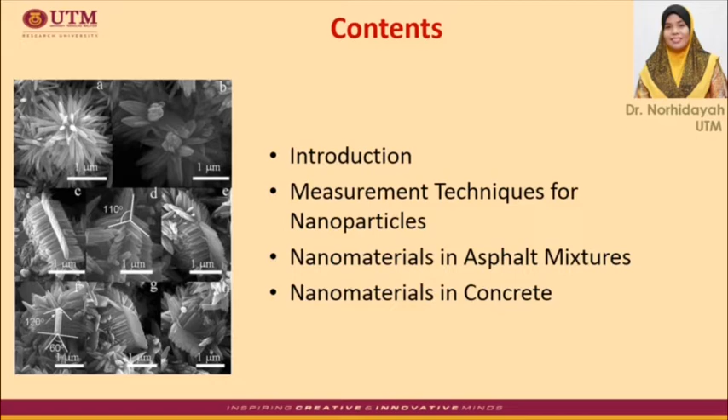Okay, this is the table of contents. The topics we're going to discuss today: first, some introduction about nanomaterials and nanotechnology, then measurement techniques for nanoparticles, nanomaterials in asphalt mixture, and finally nanomaterials in concrete. Okay, first, let's have a look at the overview of nanotechnology.

Nanotechnology is science, engineering and technology conducted at the nanoscale, which is about 1 to 100 nanometers. It is a branch of technology that involves the application of extremely small things and can be used across all other science fields such as chemistry, biology, physics, material science and engineering.

Compared to previous works before the year 2000, most studies focused on macro and micro research. After 2000, nanoscience became significant in solving industrial problems. Nanoscience and nanotechnology involve the ability to see and to control individual atoms and molecules.

Everything on Earth is made of atoms: the food we eat, the clothes we wear, the buildings and houses we live in, and even our own bodies. But something as small as an atom is impossible to see with the naked eye, and therefore many more technologies are discovered for better understanding of nanomaterials.

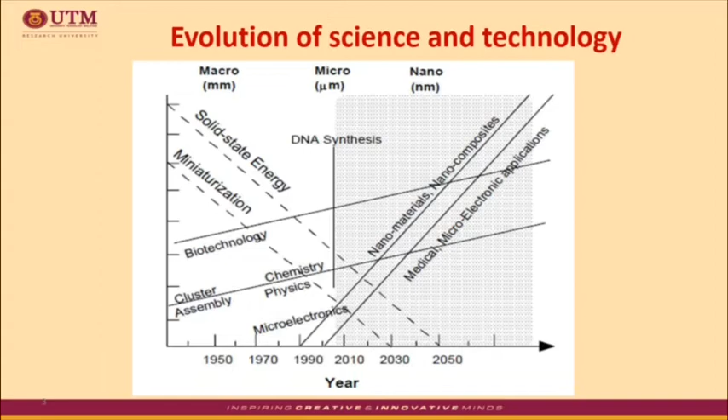Okay, let's have a look at the application of nanotechnology. The 2000s saw the beginning of applications of nanotechnology in commercial products, and most applications are limited to the bulk use of passive nanomaterials.

Currently, the major application is related to the following products: for example, titanium dioxide in sunscreen, cosmetics and some food products; silver nanoparticles in food packaging, clothing, disinfectants and household appliances; carbon nanotube for stain-resistant textiles; and cerium oxide as a fuel catalyst.

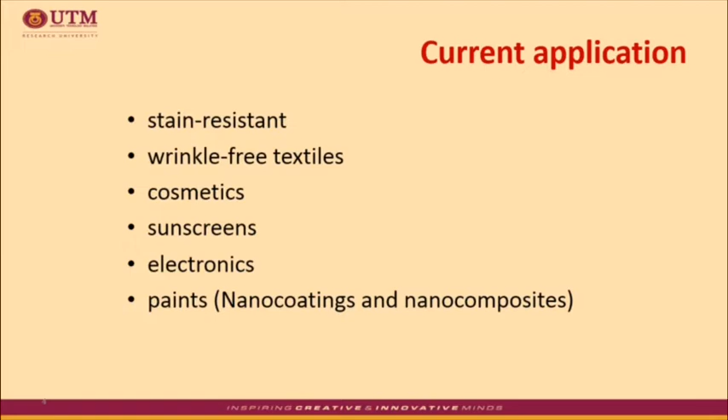Other major applications are also significant in the field of electronics and paints, such as nanocoating and nanocomposite. And then there are many more applications in other fields.

Nanotechnology is also being applied or developed for a variety of industrial and purification processes. Purification and environmental cleanup applications include water filtration, wastewater treatment, and groundwater treatment.

In the construction industry, applications may include construction materials such as for steel fabrication, in glass, surface coatings, as well as for fire protection and detection.

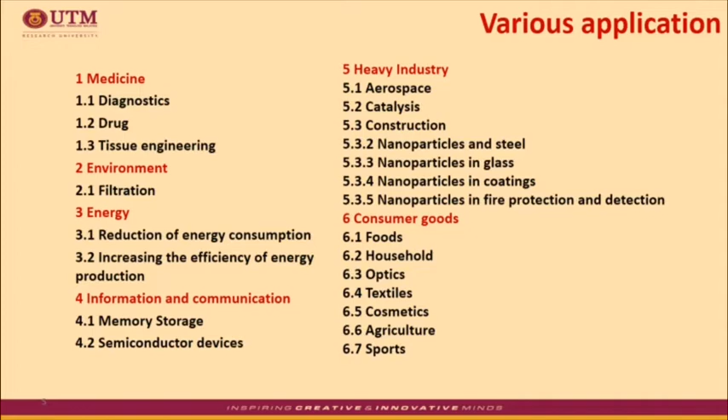So basically, what is nano? The word nano is used to indicate 1 billionth of a meter, or 10 to the power of minus 9, and a world of things is built up from the tiny scale of nanometers.

Nanoparticles or nanomaterials, in principle, refer to material particles having dimensions and tolerance of less than 100 nanometers, or between 1 and 100 nanometers, especially involving the manipulation of individual atoms and molecules. This concept of nano takes advantage of the particle's characteristics, which are very small in size.

It's lighter, where particles can move faster, and also has a high specific surface area, making the material more reactive than materials at micro or macro size.

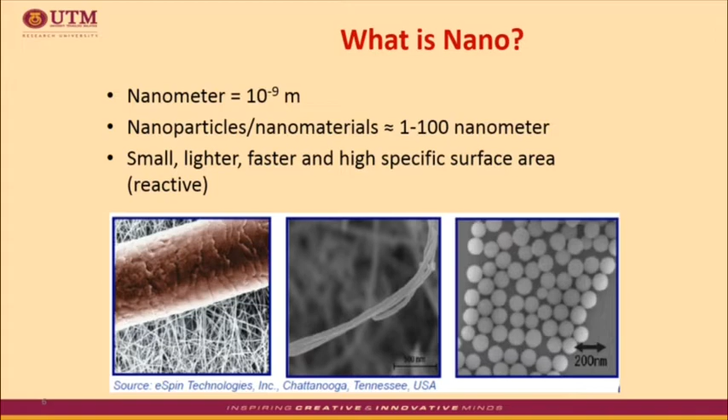Based on this slide, the figure compares different things with various sizes on the nanoscale, from the size of a baseball at 100 million nanometers to bacteria size of 1000 nanometers, and of course these are not considered nanoparticles yet. As mentioned, nanoparticles or nanomaterials are considered at the size of less than 100 nanometers, as shown in the figures such as the virus, protein or DNA, glucose, and finally water molecules.

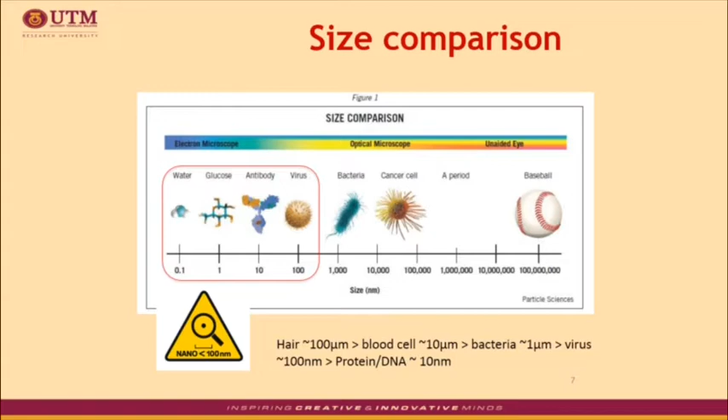Well, the closest example is water. Water is an example of nanoassemblies of molecules, where the size of the water molecules is within the nanoscale, made of oxygen and hydrogen.

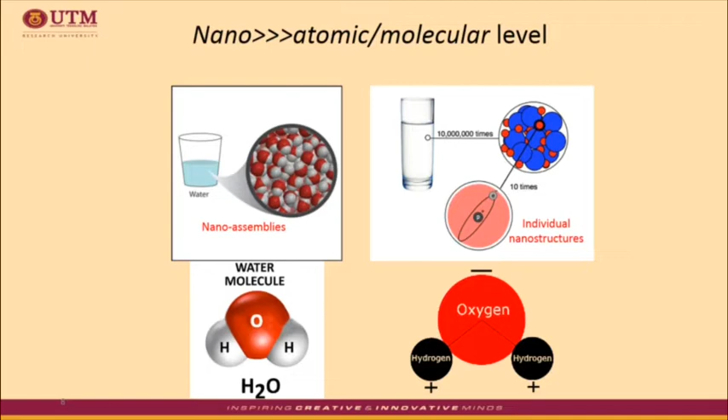Okay, now let's have a look at various terms related to nanomaterial study. First is quantum mechanics, or sometimes called quantum physics. This term can be referred to as a subset of physics explaining the physical or mechanical behaviors at the molecular and atomic level.

Other than that, any material studied at the nanoscale level will normally be considered as ultra small or superfine material. So when we talk about nanoscience or nanotechnology, it's about the study of materials at the nanoscale, which involves the design, fabrication, and application of nanostructures or nanomaterials.

And this study requires advanced imaging techniques for investigating the material's behavior and producing very fine powders with particle sizes between 1 to 100 nanometers. Furthermore, the study also covers the fundamental understanding of the relationships between physical properties and material dimension.

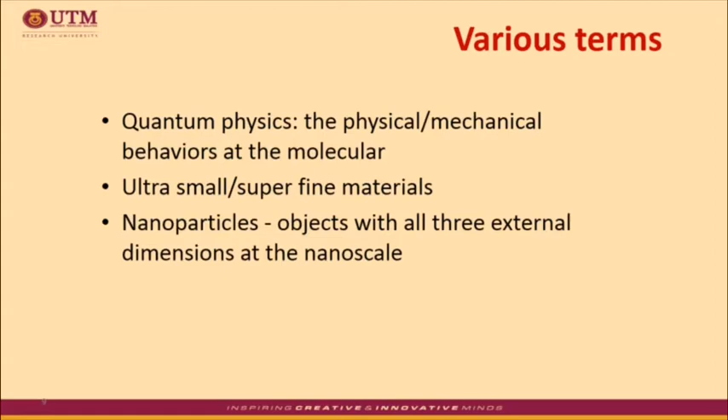Next is the nanomaterials. So how can we define the nanomaterials? This is not a new undiscovered material. It can be produced from any types of normal materials but they are very small in size. Like what I have mentioned earlier, at least one external dimension is in the size range of 1 to 100 nanometers.

So due to their small size, the properties are no longer the same as when they are in a big size. And they can be either organic or inorganic. For example, metal, polymer, electronic, ceramic, and composite.

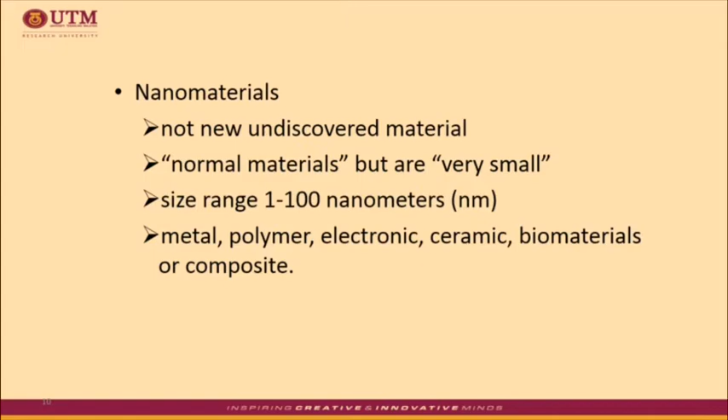Today, scientists and engineers are finding many ways to produce materials at the nanoscale. This is to take advantage of their enhanced properties such as higher strength, lighter weight, increased control of light spectrum, and greater chemical reactivity than their larger scale counterparts.

The unique properties of nanomaterials have led to their use in many applications in industrial and non-industrial sectors like aerospace, construction, energy, textile, automotive industry, transport, and medical technology. A few examples of application are presented in the table, as you can see here, such as carbon nanotubes, titanium oxide and dioxide, platinum, iron silica, nano clay, silver and gold, and graphene.

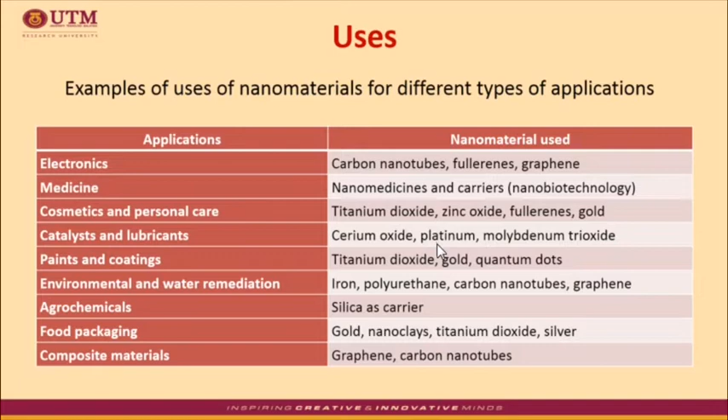Okay, next we have a look at the classification of nanomaterials. In general, they can be identified according to their dimension and morphology, which is their form and shape. Nanomaterials can be classified as, first, zero-dimensional, such as spheres and clusters, then one-dimensional, such as nanofibers, next two-dimensional, such as films, plates, and networks, and finally three-dimensional, which can be in many forms.

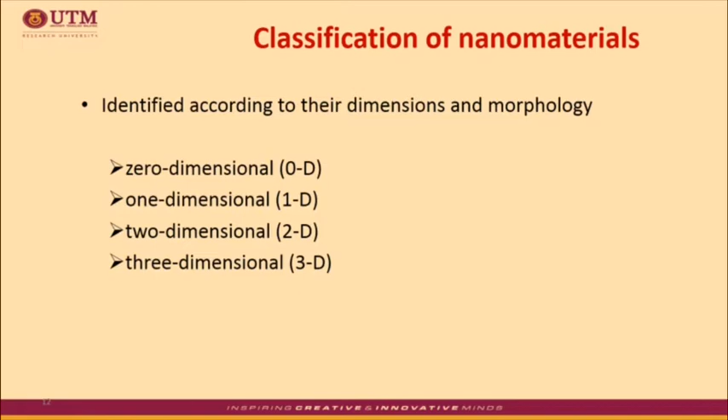Okay, let's have a look at the details of the classification. This slide shows the details of the various dimensions of nanomaterials. First, like I said earlier, we have zero-dimensional, which refers to a nanoparticle with all dimensions in nanoscale, which is less than 100 nanometers. It's like one dot.

And then we have one-dimensional, where at least two dimensions are in nanoscale, such as nanotubes and nanowires. This refers to the cross-section of the nanotubes, for example, as you can see from the image provided, which means the length of the nanotube is not in nanoscale, but the cross-section is.

And then we have two-dimensional, which has one dimension in nanoscale, for example, the film thickness. The film thickness is less than 100 nanometers, but the grains are not nano size. It's microcrystalline. Applications include, for example, nano coatings, nano laminates, and nanofilms. So meaning that not all the dimensions of the nanofilm are in nanoscale, only the thickness.

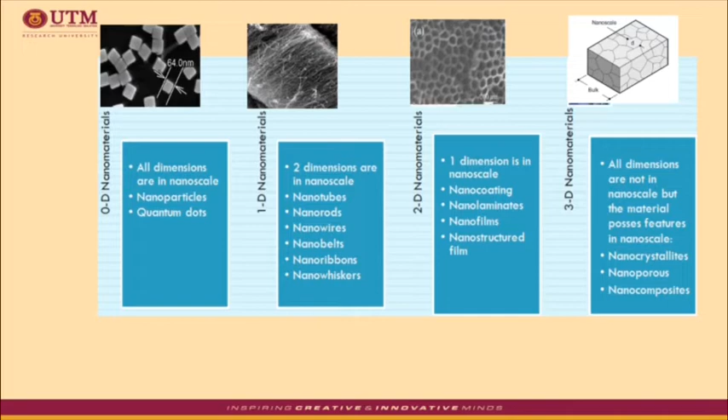Okay, next we have three-dimensional nanomaterials. This time, the film has a thickness of more than 100 nanometers, but contains grains with dimensions in nanoscale, or nanocrystalline, such as the nanocomposite. So it can be in various forms, whether made of glass or metal, or any other relevant material. Later, we're going to discuss different types of nanomaterials used in asphalt mixture and also in concrete.

The high surface-to-volume ratio introduces many size-dependent phenomena that lead to greater chemical reactivity and mechanical properties such as strength. An increased surface area-to-volume ratio also means increased exposure to the environment. The surface area-to-volume ratio for a material made of nanoparticles has a significant effect on its properties. Firstly, materials made up of nanoparticles have a larger surface area compared to the same volume of material made of bigger particles. For example, let us consider a cube as shown in the slide.

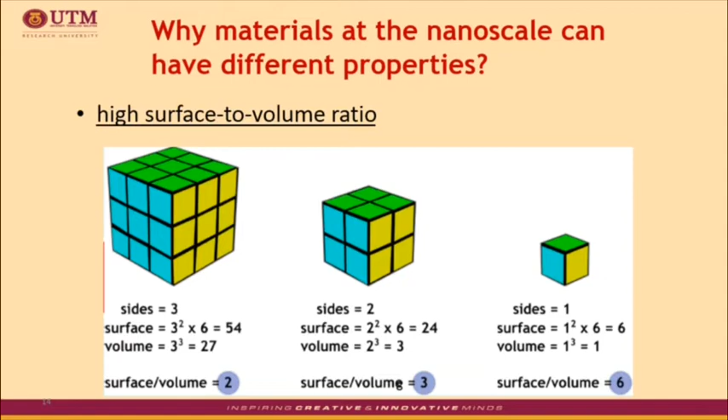There are two components of the synthesis of nanomaterials. First is to make or produce the nanomaterials, which involves two major processes: top-down and bottom-up. Second is to characterize the size-induced properties or performance, for example, in various chemical compounds such as metal or elements such as carbon and oxide, and also the morphology and structure of the materials.

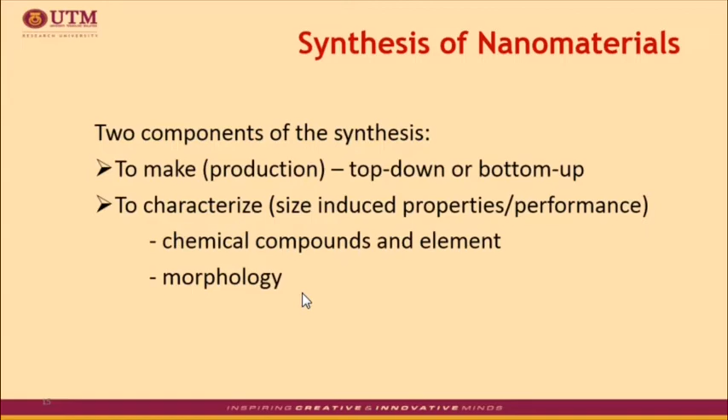Okay, next we have a look at how to create nanomaterials. There are many different ways of creating nanostructures, and of course, macromolecules or nanoparticles and so on can be synthesized artificially for certain specific materials. Using these methods, synthesized materials can be arranged into useful shapes so that finally the material can be applied to a certain application.

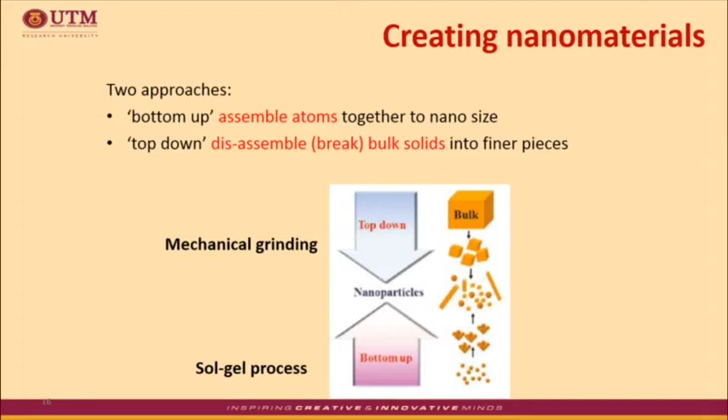The first figure shows the schematic representation of the principle of mechanical milling. This is a typical example of a top-down method of nanomaterial synthesis, where the material is prepared not by cluster assembly but by the structural decomposition of coarser-grained structures as the result of severe plastic deformation. This has become a popular method to make nanomaterials because of its simplicity. Another benefit is that the equipment needed is not expensive, and it's applicable to different classes of materials.

However, there are concerns about this method, such as contamination from the milling process. In fact, the contamination problem is often given as a reason to dismiss the method, at least for some materials. Mechanical milling is typically achieved using high-energy shakers or mills. The energy transferred to the powder from the steel balls depends on the rotational speed, size and number of the balls, ratio of the ball to powder mass, and the time of milling. So nanoparticles are produced by the shear action during grinding.

The second figure shows the schematic representation of the sol gel process of synthesis of nanomaterials. The sol gel method is very popular amongst chemists and widely employed to prepare oxide materials. In materials science, the sol gel process is a method for producing solid materials from small molecules. This process is a wet chemical technique that uses a chemical solution to produce an integrated network or gel. They undergo hydrolysis and polycondensation reactions to form a system composed of nanoparticles dispersed in a solvent.

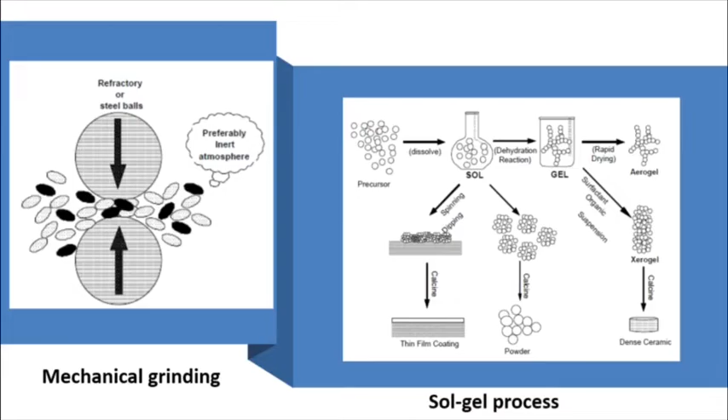So after creating the nanomaterials, they can be characterized in terms of physical properties such as area and shape, chemical properties such as reactions, compounds and elements, and their structural properties in terms of mechanical properties, particularly strength.

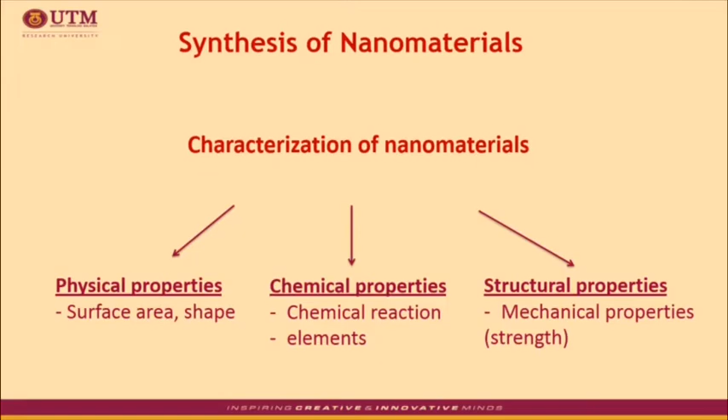Okay, as I mentioned previously, nanotechnology has been used in various fields, including civil engineering works. Here are some of the unique properties provided by having nanomaterials in the structures: lighter and stronger composites, fire insulation, which refers to the reduction in thermal transfer rate, sound absorption, water repellence or waterproofing, and finally, better cementitious materials.

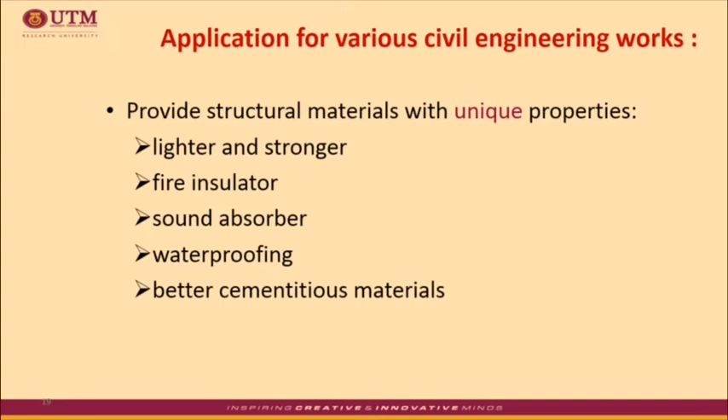Okay, next, let's have a look at measurement techniques for nanoparticles. There are various techniques for detecting, measuring, and characterizing nanoparticles. There is not a method that can be selected that is the best method, but rather a method is chosen to balance the restriction of the type of sample, the information required, time constraint, and the cost of the analysis.

A straightforward technique may simply detect the presence of nanoparticles. Others may give the quantity, the size distribution, or the surface area of the nanoparticles. These measurement techniques differ from characterization techniques for assessing the chemical content of a nanoparticle sample, the reaction on the surface of the nanoparticles, or the interaction with other chemicals present. And sometimes, measurement techniques will be combined to provide more information from one sample.

So basically, the properties of nanoparticles are size-dependent and can be expressed in a linear dimension characteristic derived from its shape. There are two basic concepts of the measurements. First is by taking the actual measurements of the dimension using microscopic techniques, for example, the measurement of many dimensional parameters from the particle image. Second is by considering the relationship between particle behavior and its size, such as using dry powders dispersed in suspension.

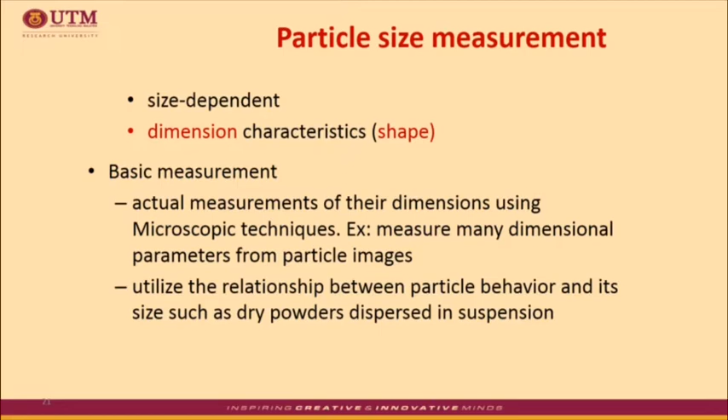This slide shows the different measurement techniques such as field emission scanning electron microscope, FESEM or SEM, high resolution transmission electron microscopy, TEM or HRTEM, and then PCS, surface area analysis, and XRD. Since different techniques provide different information, efforts have been made to standardize the way nanoparticles are measured. This is to assess the risk of exposure to human health and the environment. The details of the technique will be discussed in the next slide.

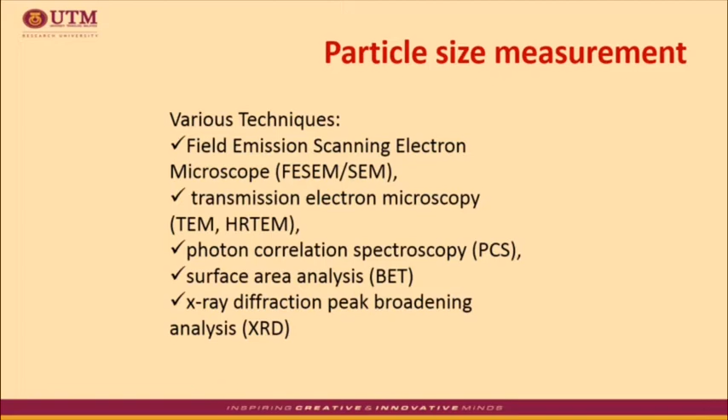First, let's start with the microscopy method. These three methods are normally used to determine the nanoparticle size and characterization. The first is scanning electron microscopy or FESEM, field emission scanning electron microscopy. This method uses a high energy electron beam and the beam is scanned over the surface. The sample must be under a vacuum and electrically conductive at the surface. This can be achieved by having a coating on a non-conductive sample. This requirement can be restrictive, and again, this technique can be time-consuming and expensive.

Then, the transmission electron microscopy. These techniques combine the ideas of looking at the surface of the sample and into the sample with an electron beam. It uses an electron beam to interact with a sample to form an image. The sample preparation can be difficult as a thin sample must be prepared, and the process can be time-consuming and costly. So another version of TEM is HRTEM or High Resolution Transmission Electron Microscopy. This gives a higher resolution which is beneficial when studying nanoscale samples. However, it does require understanding of the sample to allow better description of the results.

Next is the atomic force microscopy or AFM. It's a form of scanning probe microscopy. It uses a mechanical probe to feel the surface of a sample. This can offer a 3D visualization for air samples or liquid dispersions. This technique requires less cost and time than the TEM or SEM.

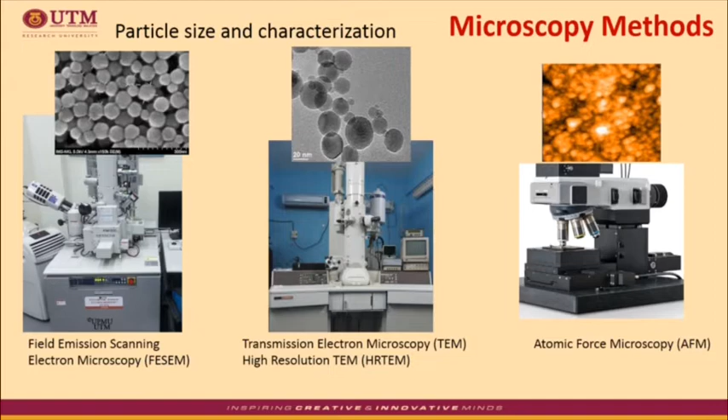However, based on previous application of these three microscopy methods, there are criticisms related to the measurement of nanoparticles. The criticism is mainly due to the difficulties in preparing the sample for scanning, while others are on the resolution of crystalline samples and whether individual crystal particles are correctly identified, and the need for representative samples to be chosen for the study. A small sample is chosen to be viewed, and this may not be an average of the sample as a whole.

Next are the PCS, Differential Mobility Analyzer, and CPC. These methods are normally used to determine the particle size distribution and concentration of particles. Let's start with PCS. PCS measures the scattering pattern produced or intensity of the scattered light when the light is shone through a sample. This will give the radius of a sample and therefore an estimation of the average particle size and distribution of particles through the sample. The sample must be a liquid, solution, or suspension. It must also be very dilute or the scattering of the light can be unclear. The technique is sensitive to impurities and the viscosity of the sample must be known.

Next is the DMA. This technique will classify charged particles according to their mobility in an electric field. An aerosol sample is charged and sent in airflow into a chamber where an electric field can be applied. The rate at which the particles migrate to the end of the chamber will depend on their electrical mobility. Particles with the same electrical mobility will be the same size, and then sorted into different sizes and the size distribution.

Next is the CPC. A CPC uses a condensation technique to enlarge small particles, such as nanoparticles, to a size that can be more easily detected by an optical detector. This is to determine the concentration of particles in a sample. The technique is suitable for aerosol samples and higher temperature samples, which can be up to 200 degrees Celsius.

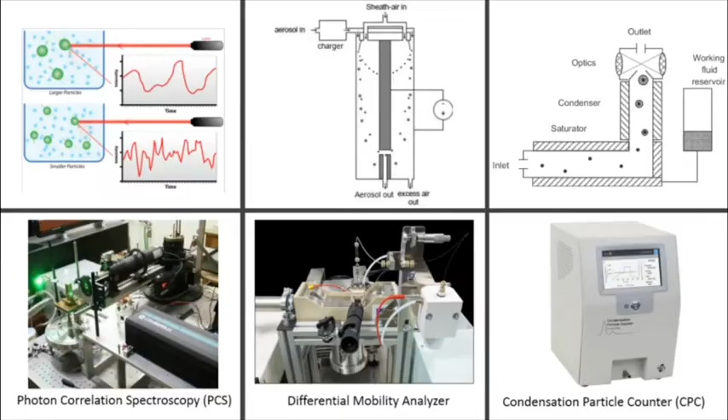Next we look at NTA (Nanoparticle Tracking Analysis), XRD, and APM (Aerosol Particle Mass Analyzer). These methods are normally used to determine particle size distribution and particle mass. NTA is a technique that provides information on particle size distribution and a real-time view of the nanoparticles in a sample. The sample must be a suspension, for which a wide range of solvents can be used.

A laser light is used to directly visualize the nanoparticles through an optical microscope. A digital camera is also used to record the observed particles, and software can then produce a frequency size distribution graph. NTA could be combined with techniques such as PCS to maximize the information and accuracy of the measured parameters.

Then XRD, X-ray diffraction, which can be used to look at single crystal or polycrystalline materials. A beam of X-rays is sent into the sample, and the way the beam is scattered by the atoms in its path is studied. The use of XRD is often compared to microscopy methods. XRD avoids issues of representative samples and determining crystals as opposed to particles. However, XRD can be time-consuming and requires a large volume of sample.

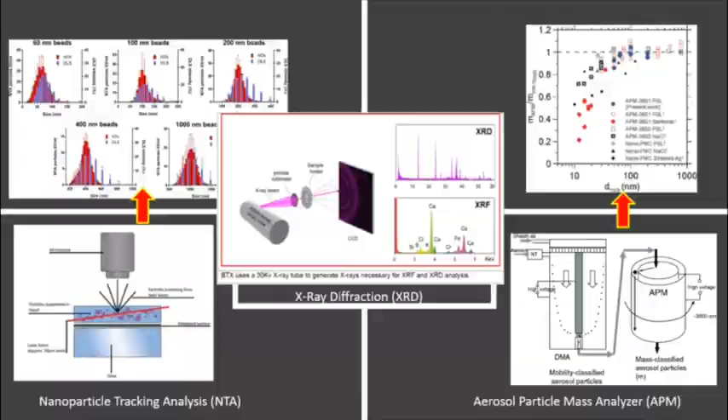So among all the methods presented here, how do you consider which method should be selected for your work? Here I have listed a few considerations in the method selection. First, you have to be clear on what exactly the aim of the measurement is, whether your concern is on number, mass, particle size, or surface area.

Then, what type of sample is required for the analysis, whether it's in suspension, solid, or liquid. Does the technique require the sample to have certain properties or be prepared in a certain way? What exactly is the amount of sample required, and will the sample be destroyed - that is, destructive or non-destructive? And how long is the analysis, and what are the costs involved in the measurement technique. Therefore, it should be noted that the right selection of the method determines the final quality of the results.

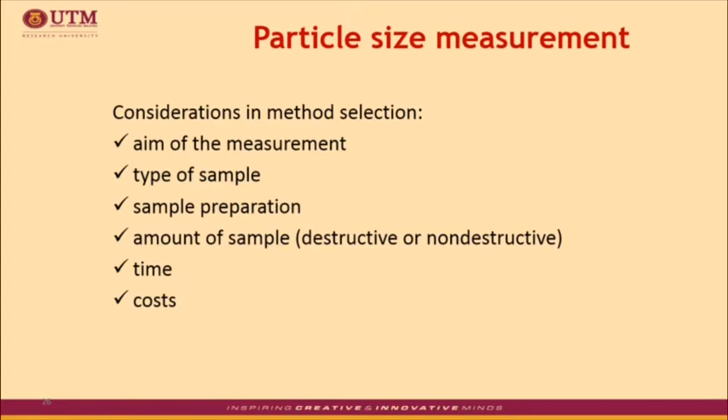Next, let's have a look at the various types of nanomaterials used in asphalt mixtures. In pavement engineering research, nanotechnology is used as a form of new materials or device and system at the molecular level. A number of researchers have used nanomaterials in Portland cement materials. However, nanomaterial use in asphalt pavement started a bit late. In recent years, some researchers have started working on the improvement of asphalt materials with nanomaterials in asphalt cement and emulsion.

Although bitumen materials such as asphalt are mainly used on a large scale and in large quantities for road construction, the macroscopic mechanical behavior of these materials still largely depends on the microstructure and physical properties at the micro level. Although researchers, material manufacturers, and engineers have explored this potential for many years, the use of nanotechnology has been limited. New efforts are being taken to develop nanomaterials for pavement applications that will improve the mechanical and physical properties at the nanoscale, as well as the durability of this important group of building materials.

Therefore, nanotechnology enables the design of systems with high performance density, high sensitivity, surface-specific effect, large surface area, high pressure resistance, and catalytic effects. All these properties are directly or indirectly derived from the small size of the nanoparticles. There are various nanomaterials which have potential to be used in asphalt modification, such as nano clay, nanosilica, nano hydrated lime, nanofibers, and nanotubes. A few examples of related research works are provided in the next slide.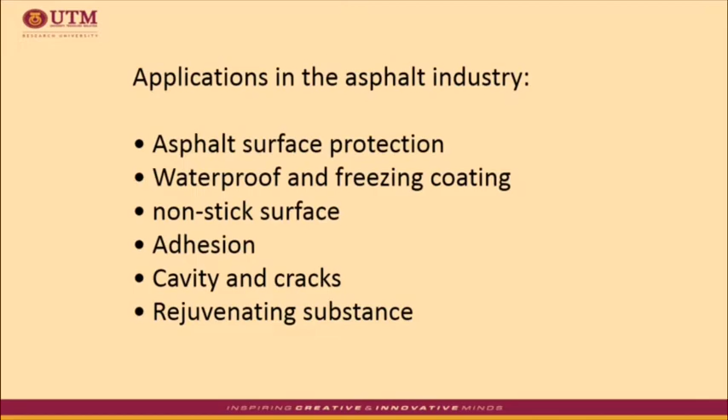Nanotechnology has various applications in the asphalt industry, including asphalt surface protection against sunlight, waterproof and freezing coating of asphalt surface, making a non-stick surface for easier control of asphalt mix steam, providing better adhesion between two layers of asphalt or between asphalt layer to non-asphalt layer, and cavity and crack control. Some nanomaterials are also used as a rejuvenating substance for aging problems.

Researchers have used nanomaterials modified asphalt and characterized properties such as dynamic modulus, creep, fatigue, and rutting. For example, rutting depth measured using the asphalt pavement analyzer (APA) illustrated that adding 2 to 4% nanomaterials by weight of asphalt can reduce rutting depth by almost half. The rut depth of nanomaterials modified asphalt mixtures decreased compared to the control mixture, with smaller rutting depth observed for a greater percentage of nanomaterials. This shows a potential improvement in the properties of asphalt mixture.

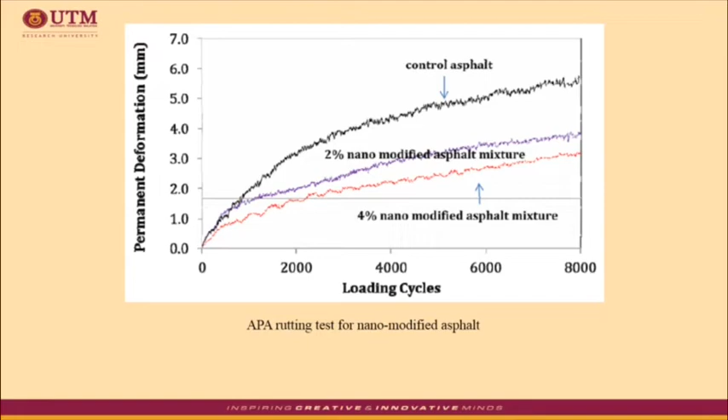Next, let's have a look at various types of nanomaterials used in asphalt mixture.

Let's start with nano clay as a modifier of asphalt. So what is nano clay? Nano clay is nanoparticles of layered mineral. It's a modified clay, and based on previous study, it has potential to reinforce and modify asphalt binder, and was also found compatible with asphalt and polymer.

Here are some benefits of nano clay modified over the conventional asphalt binder. Previous study has found that the addition of nano clay in asphalt binder has improved short and long-term aging resistance.

It also has potential to enhance various properties such as stiffness, tensile strength, tensile modulus, flexural strength, and thermal stability. Other studies found that nano clay can provide higher rutting resistance compared to conventional asphalt binder. Research on asphalt binder shows that a small percent of nano clay in the mixture may significantly improve the performance of asphalt materials.

For example, in some research work, it was found that 2% of nano clay in the asphalt binder may increase the shear complex modulus almost 2 times compared to conventional asphalt binder. This indicates the massive improvement in the rutting resistance of asphalt.

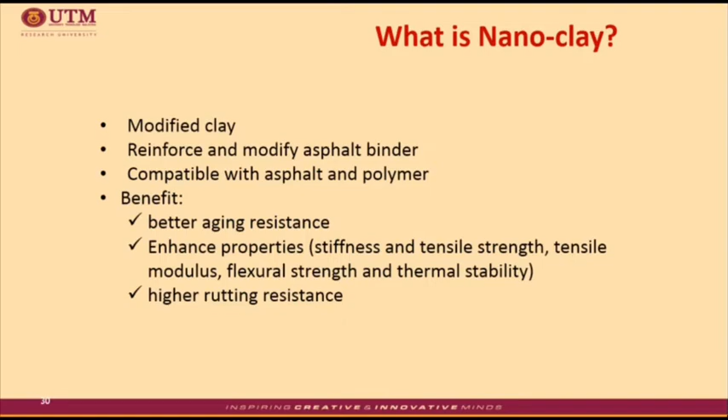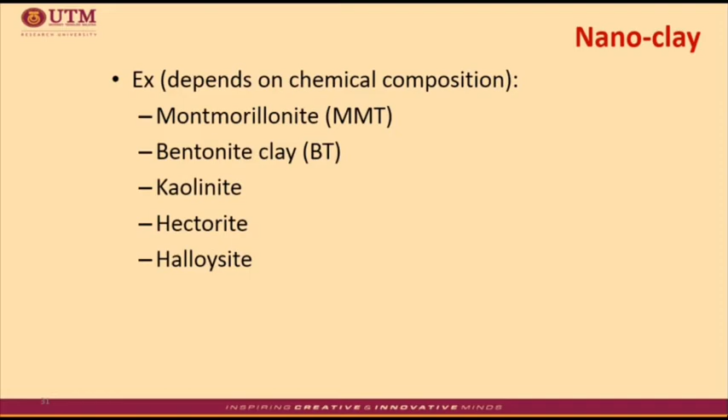Nano clay is also used to improve the modulus and tensile strength, flame resistance, and structural properties. Nano clay is widely used in modification of polymer to improve mechanical and thermal properties. One of the most frequently used types of nano clay is MMT. Other classes include bentonite and kaolin, and a few others depending on chemical composition and morphology.

This is an example of nanoclay particles, which are kind of similar to mudstone.

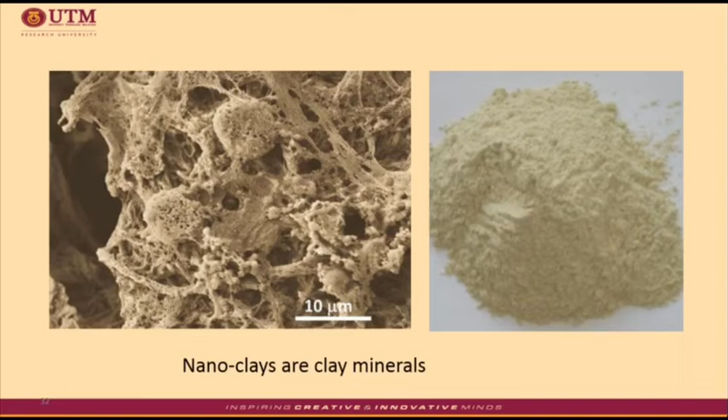Here I would like to share some results on nanoclay in asphalt. The first graph shows the results of tensile strength and the second graph shows the results of flexural strength. The addition of nanoclay from 1% to 5% has been compared to the conventional asphalt binder. From the graph, it can be seen that flexural and tensile strength increase at a constant rate by adding nanoclay. At a certain stage, it starts to decrease, which suggests an optimum content of nanoclay in asphalt.

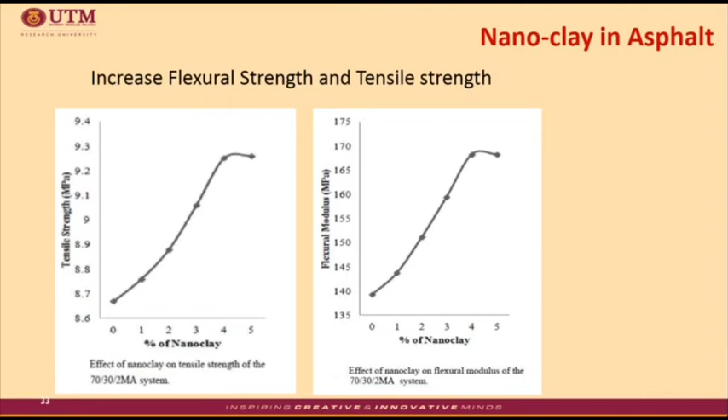Next, we have the results of penetration and softening point. Two types of nanoclay were compared with unmodified binder, with the addition of nanoclay content at 2%, 4%, and 7% by weight of the binder. Overall, it shows that the addition of nanoclay hardened the asphalt binder and increased softening point, which shows that it can stand at higher temperature before it starts to flow.

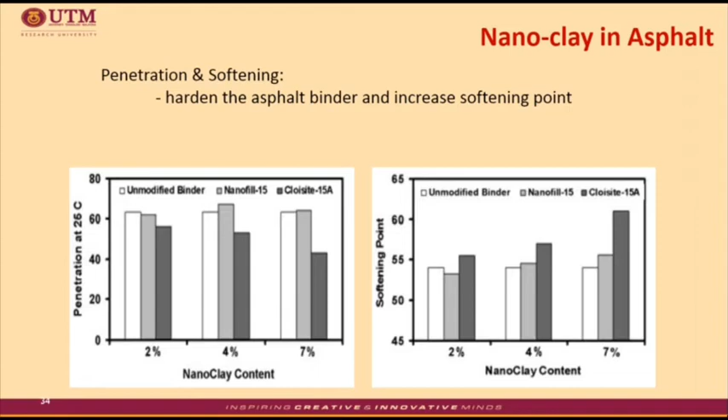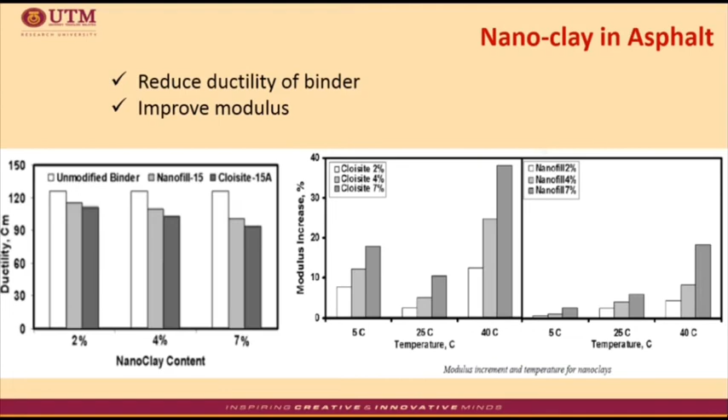Next, let's have a look at carbon nanotubes. These nanomaterials are made of carbon with diameters found to be as low as 0.4 nanometers. They possess unique mechanical properties with remarkable electrical and thermal conductivity and exceptional tensile strength because of their nanostructure and the strength between carbon atoms.

By adding a sufficiently high percentage, more than 1%, to the base bitumen, it affects the rheological properties. So by using carbon nanotubes in asphalt pavement, it can provide better rutting resistance. It was mentioned that using carbon nanotubes at 0.1% of the asphalt binder will decrease the thickness of the road layers and reduce material consumption.

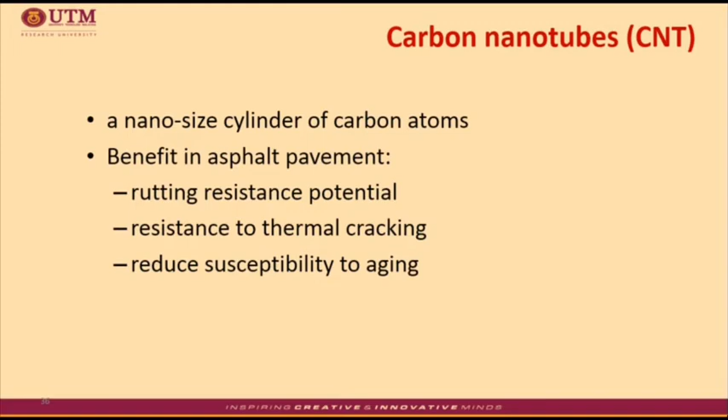Next is nanosilica. This type of nanomaterial is a abundant compound on Earth that is mainly used in industries for the production of silica gels, fumed silica, and many more. Silica nanoparticles have been used in industry to reinforce elastomers as a rheological solution. Silica nanocomposites have also received scientific attention. The advantage of this nanomaterial lies in its low production cost and high performance characteristics.

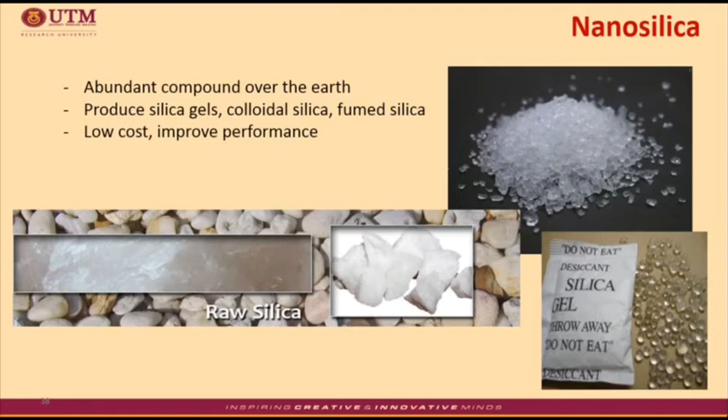The main characteristic of nanosilica is its ability to absorb moisture, and that's why in many applications this material is used to control local humidity. By adding nanosilica to the base asphalt adhesive, it slightly decreases the viscosity values of the asphalt binder. The low viscosity of the asphalt binder indicates that a lower compaction temperature or lower energy consumption can be achieved during the production process.

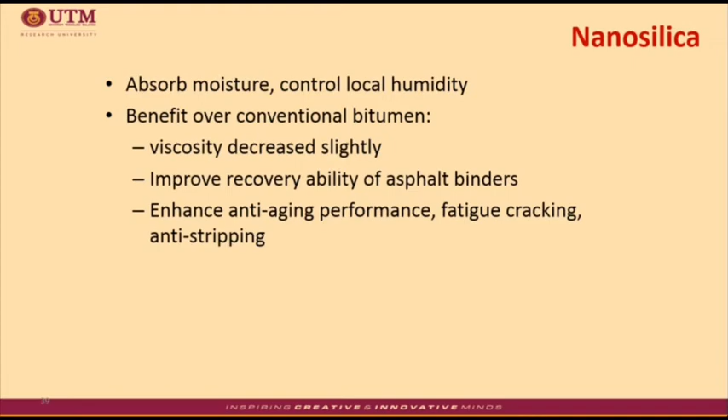Adding nanosilica to asphalt was found to improve the recovery ability of the asphalt, stress properties, and relaxation capacity of the asphalt. It also enhances anti-aging performance, fatigue cracking resistance, and anti-stripping. This slide shows micro images of nanosilica and its dispersal status in a given asphalt matrix. From the image, the nanosilica seems to be well dispersed in the asphalt.

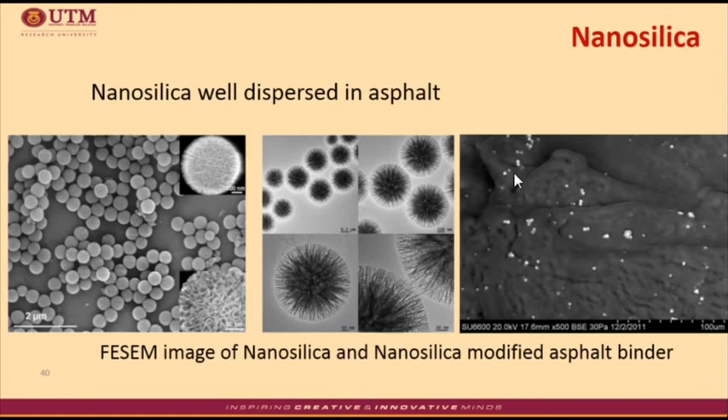Next is organosilicon, or Zycosil. This organosilicon compound contains carbon and silicon. Most organosilicon compounds are similar to ordinary organic compounds, being colorless, flammable, hydrophobic, and stable in air. Zycosil molecules, when dissolved in solvent, have an estimated size of 3 to 6 nanometers.

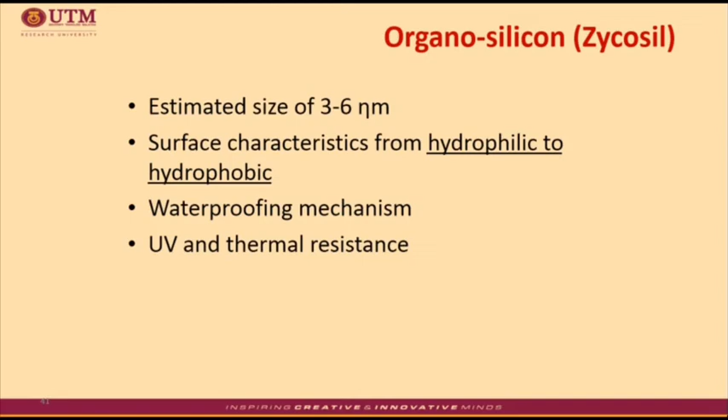These types of products provide water repellency by modifying surface characteristics from hydrophilic to hydrophobic. In other words, they provide a waterproofing mechanism to materials. This will provide a waterproofing layer on all types of soil, aggregates, and other inorganic road construction materials, and reduce the moisture susceptibility of hot mix asphalt. Another benefit is better UV and thermal resistance.

This nanomaterial is a new generation of nanotechnology that has been developed for waterproofing, UV, and thermal resistance due to its nano size and penetrative power. Water intrusion in building materials has been a problem for the last 1,000 years. These eco-friendly organosilicon products can render most materials hydrophobic for cycles of 20 to 30 years at a very economical cost.

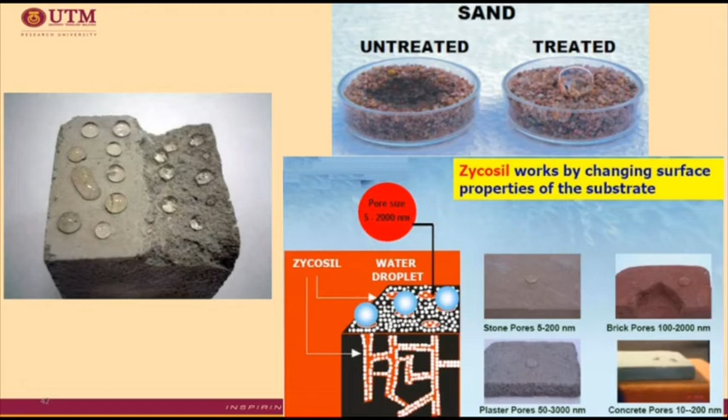So how's the performance of these nanomaterials with asphalt mixture? Based on a previous study, the use of this material in asphalt mixture containing limestone and granite increases the tensile strength between 3% to 14% respectively, compared to the control sample. Aggregate coverage with this material decreases the air voids in asphalt mixture and increases the binding capacity.

Finally, this product provides a formation of hydrophobic nanolayers on aggregates, which can lead to an increase in fatigue life.

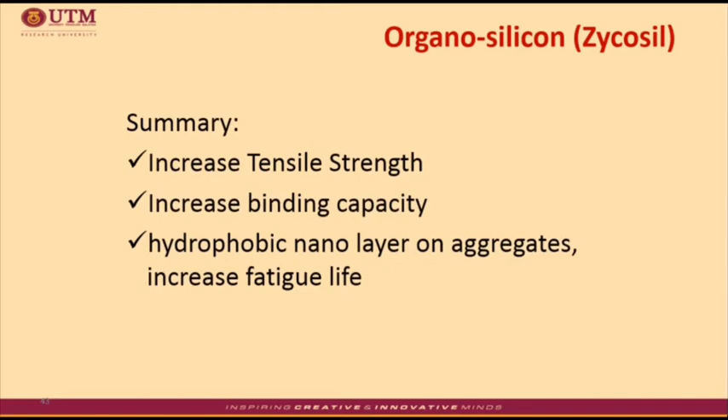The advantages of using nanomaterials in modified asphalt are widely recognized for self-healing properties, such as the use of induction heating and rejuvenation, and to improve storage stability, especially in polymer-modified asphalt. It also has the potential to increase resistance to UV, which relates to the aging problem.

In certain applications in asphalt, the nanomaterial has the potential to reduce moisture susceptibility underwater, improve the properties of asphalt mixture at low and high temperature which reflect cracking and rutting potential, and improve the durability of asphalt pavement, decrease maintenance requirements, and finally save energy and cost when evaluation is made based on life cycle or cost-benefit ratio.

These improvements in performance, durability, and life cycle cost saving compared to unmodified pavements have led to the widespread use of nanomaterials in modified asphalt pavement.

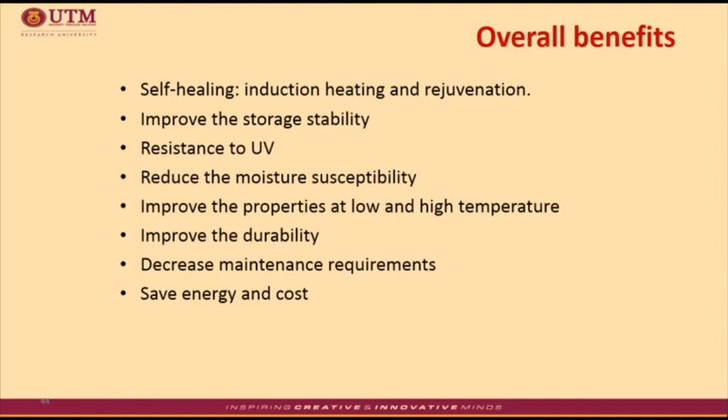Next, we have a look at different types of nanomaterials used in concrete. Concrete is a mixture of ordinary Portland cement (OPC), fillers such as sand, coarse aggregate, admixtures, and water. Concrete durability becomes a very important factor, especially when concrete is exposed to varying climatic conditions.

Therefore, there are a number of ways to improve its service life, and one of them is through the use of nanoparticles as a supplementary cementitious material in concrete, which has led to improved permeability and strength of the concrete. As material properties differ significantly at the nanoscale compared to a larger scale, the properties possessed by concrete containing these particles also vary differently.

In terms of mechanical properties, nanomaterials provide better or higher strength, and a better rate of hydration, which refers to the hardening process, along with decreased porosity, preventing crack initiation through crack arrest and interlocking effects provided by nanoparticles, which improve the toughness, shear, tensile, and flexural strength of cement-based materials. It also has the potential to provide better durability against weather, temperature, and moisture.

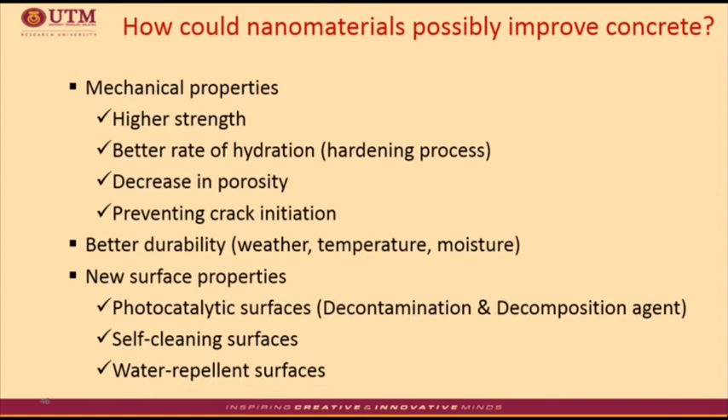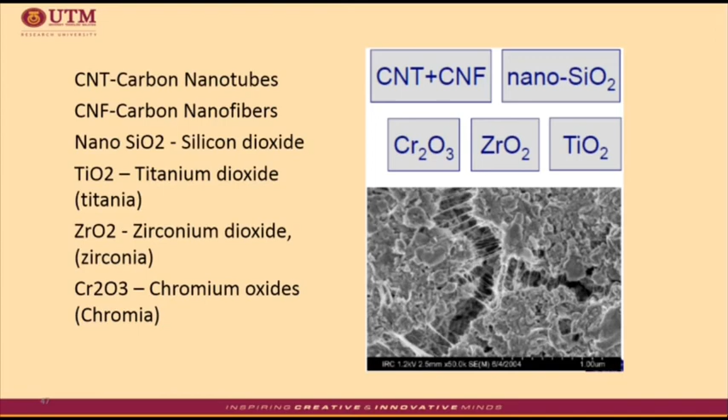The use of nanomaterials in concrete also provides new surface properties, such as photocatalytic surfaces, which act as decontamination and decomposition agents, providing self-cleaning and water-repellent surfaces. This is the list of potential nanomaterials used in concrete, such as carbon nanotubes (CNT), carbon nanofibers (CNF), nanosilica, and titanium dioxide.

First, let's look at nanosilica. Many researchers have attempted to improve the behavior of cementitious matrix by adding nanosilica in concrete. The nanosilica in concrete or mortar increases density, reduces porosity, and improves the bonding between cement matrix and aggregates, with higher compressive and flexural strength.

The compressive strength evaluation of cement mortar with nanosilica was discussed for different water-cement ratios, and from the experimental results, it is confirmed that the compressive strength of mortars with nanosilica were higher than conventional at 7 and 28 days. It was found that nanosilica behaves not only as a filler to improve the microstructure, but also as an activator to promote pozzolanic reactions and as a superplasticizer that plays an important role during mixing of cement with nanoparticles.

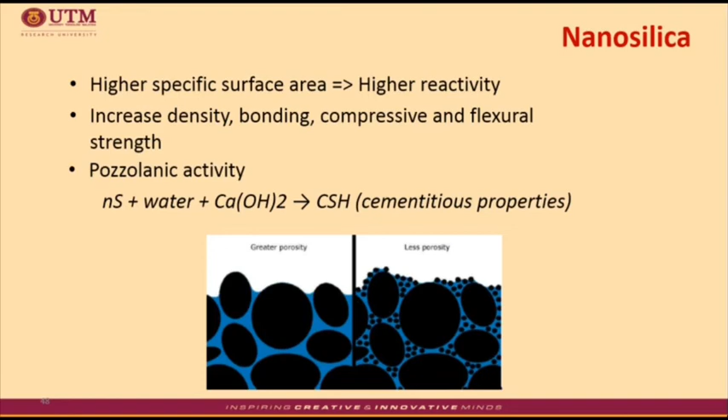The pozzolanic reaction is a chemical reaction that occurs in Portland cement upon the addition of pozzolans, which in this case is the nanosilica, with the presence of water. The process provides good cementitious properties in concrete and improves cement hydration during the hardening process.

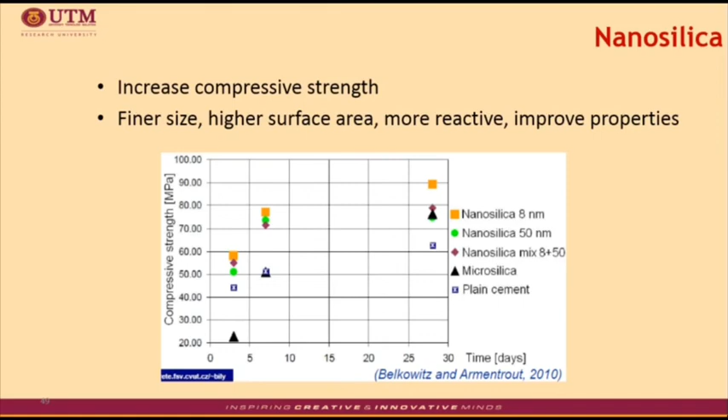Next is carbon nanotubes. This material acts as nano reinforcement in cement-based materials. They provide extraordinary strength with a very high modulus of elasticity and tensile strength, and they also have unique electronic and chemical properties. That's why, when researchers think of nanomaterial reinforcement in concrete, carbon nanotubes come as the first option.

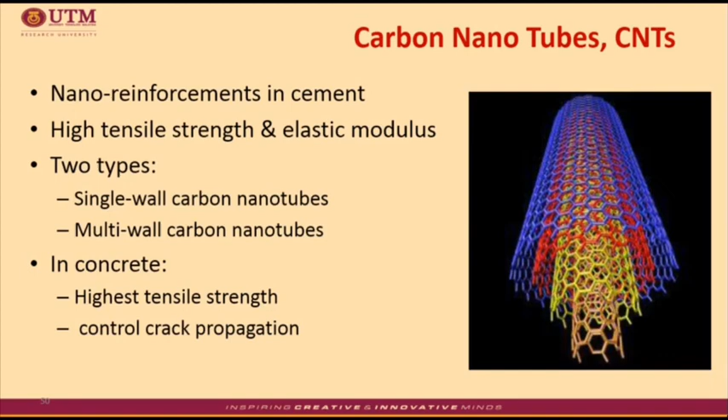The addition of CNT to concrete can significantly enhance some mechanical as well as physical properties of the material. The use of carbon nanotubes increases the strength and durability of cementitious composites, as well as helping with pollution reduction. CNT in concrete also helps control crack propagation, and it has been proved that there is a good interaction between CNTs and cement phases, indicating the potential for crack bridging and enhanced stress transfer.

Then we have nano titanium dioxide. It is another material which has gained popularity for its usage in concrete studies in recent times. Similar to investigations on nanosilica in cementitious matrix, many researchers have discussed possible methodologies and observed advantages of using nanotitanium dioxide in cement matrix, especially to achieve high mechanical properties such as compressive and flexural strength, and the most interesting property, which refers to the photocatalytic effect.

This material acts as nanoparticles that fill the nanovoids in concrete, which leads to an increase in compressive strength. These nanoparticles accelerate and increase the degree of hydration. Its photocatalytic properties have been used to remove mainly organic pollutants from surfaces directly exposed to UV radiation, such as pavements and cement-based finishing products, making it a self-cleaning product.

The use of titanium dioxide photocatalyst in combination with cementitious and other construction materials has shown a good effect in the removal of nitrogen oxide.

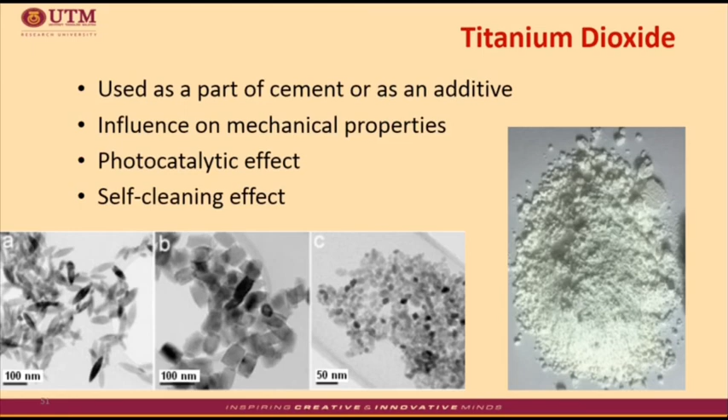Through the explanation of nanomaterials, I think I have mentioned the photocatalytic effect a few times. So what exactly is this effect, or photocatalytic oxidation, as it's otherwise termed? This condition involves the decomposition of pollutants by UV radiation.

Then, as the water flows off the surfaces, it removes pollutants effectively. This concept is used in Japan to keep paving clean and to reduce the effect of air pollution.

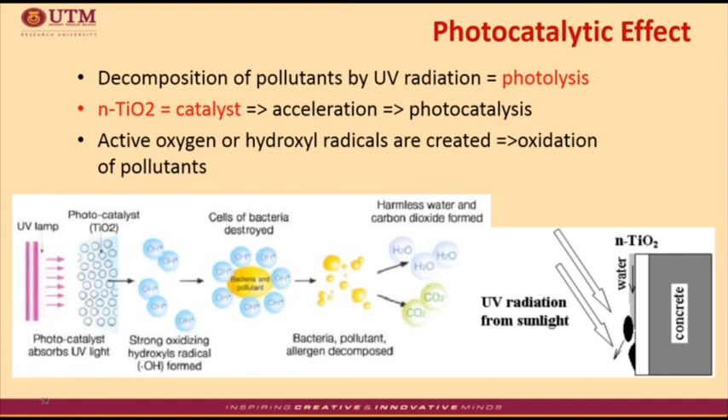First, in terms of instability of the particles, retaining active metal nanoparticles is highly challenging as the kinetics associated with nanomaterials is rapid. In order to retain the nanosize of particles, they are encapsulated in some other matrix, which are prone to attack and transformation. These include poor corrosion resistance, high solubility, and phase change of nanomaterials.

Next, fine metal particles can act as strong explosives due to their high surface area coming into direct contact with oxygen. Their exothermic combustion can easily cause explosion.

Then, in terms of impurity, because nanoparticles are highly reactive, they interact with impurities as well. In addition, encapsulation of nanoparticles becomes necessary when they are synthesized in a chemical solution.

Next, biologically harmful. Nanomaterials are usually considered harmful as they become transparent to the cell. Toxicity of nanomaterials also appears predominant due to their high surface area and enhanced surface activity. The interaction with liver or blood could also prove to be harmful.

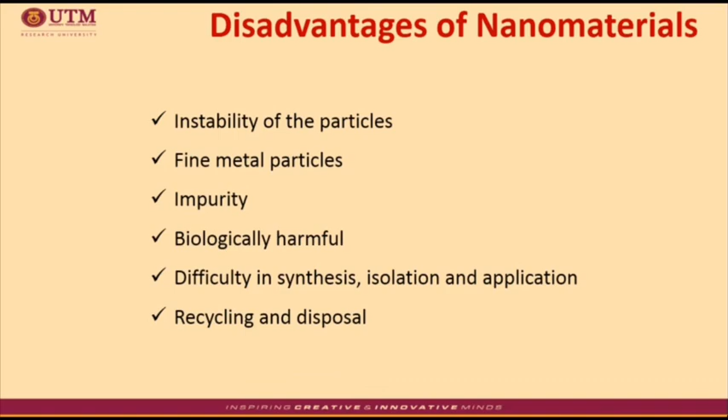And finally, on recycling and disposal, there are no hard and fast safe disposal policies evolved for nanomaterials. Issues of their toxicity are still under question, and results of exposure experiments are not available. Hence, the uncertainty associated with effects of nanomaterials is yet to be assessed in order to develop their disposal policies.

Before I end my lecture, I just want to highlight a little bit more on potential hazards of nanomaterials. There are concerns about the use of nanomaterials for the safety of the environment and humans. This concern should be specifically addressed in road pavement applications.

In 2004, the Royal Society and the Royal Academy of Engineering published a major review of the opportunities and uncertainties of nanotechnologies. This was one of the first reports to highlight the potential risks to health and environment that may arise from exposure to nanomaterials. Following significant research in this area, there is now substantial evidence indicating considerable differences in hazard between nanomaterials and their bulk counterparts, and also between different types of nanoparticles.

So, potential issues for nanomaterials which should be kept in mind when handling and using them include: first, in terms of reactivity, surface charge may play a significant role, and nanomaterials can possess a significant proportion of reactive metals. For example, residual catalyst from the manufacturing process may possess hazardous properties. In addition, photocatalytic nanomaterials may also cause inflammation and oxidative damage.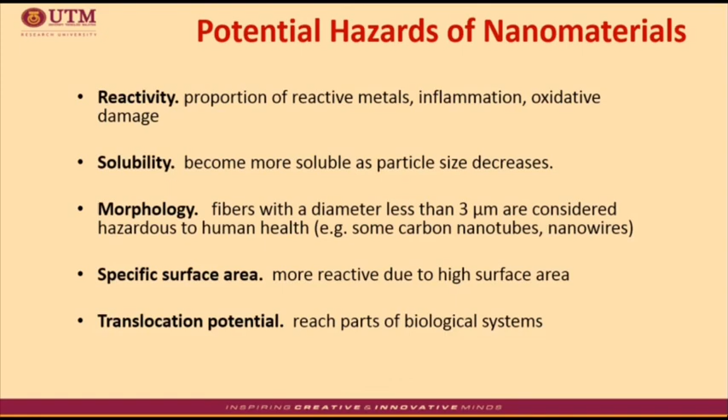Therefore, proper precaution and information regarding handling of nanomaterials should also be studied and taken into consideration for future research and application. In addition to what we have discussed previously, it should be noted that a number of issues on using nanomaterials for asphalt and concrete pavements need to be further understood. The study is still in its very early stages, with more aspects of mechanical, physiochemical, and morphological characterization of nano-modified asphalt and concrete mixtures to be considered in the future.

Okay, that's all for nanomaterials.